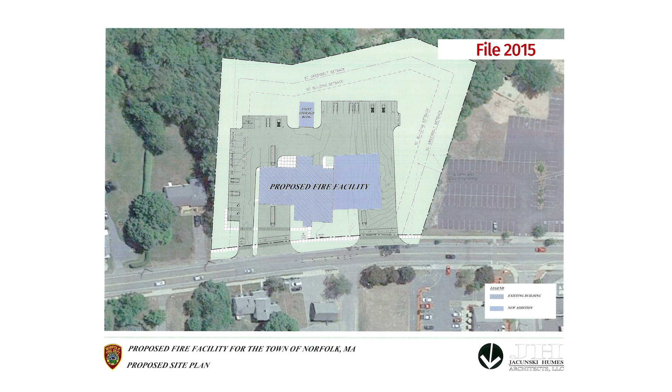The cost of the renovations at 14 Sharon Avenue significantly exceeded the budgeted construction cost and did not leave enough money to complete the fire station renovations.

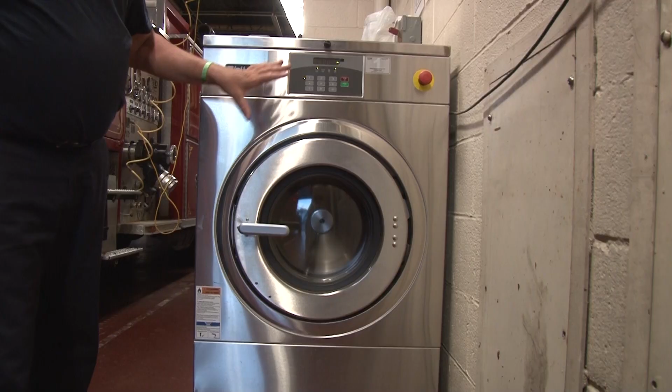Since that time, the fire department has continued to make the best of it and operate in a building that is well past its useful life, is not compliant with current building codes, and limits the department's ability to function in an efficient way. However, the good news is that $3.3 million remained from the amount approved at the 2015 town meeting, which allowed the town to take a fresh look at the project.

In January 2021, the Select Board decided to restart the fire station project by forming a Fire Station Building Committee. Using the money remaining from the 2016 project, the committee was tasked with: 1.

Soliciting proposals from, interviewing, and recommending the hiring of an owner's project manager and architect for the project. 2. Working with the selected OPM and architect to develop a fire station that will meet the current needs of the department, as well as consider future needs for expansion.

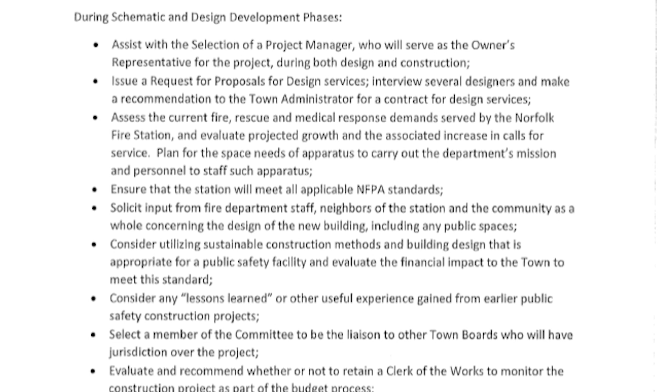3. Ensuring that the project is in keeping with the town's character and implements sustainable design practices that align with Norfolk's designation as a green community. 4. Meeting with the Select Board at critical milestones to provide project updates and receive approval to move forward with subsequent design phases. And finally, developing methods for community engagement and understanding for the project.

With these tasks in mind, the Fire Station Building Committee was formed in March of 2021. The Select Board desired that the committee include members of the community with backgrounds in the architecture, engineering, and construction industries, and that goal has been met.

In addition to the fire department chief, town administrator, town finance director, and a town resident firefighter, the remaining community members all have architecture or engineering backgrounds and are familiar with the Massachusetts public construction process.

Since forming, the committee has worked diligently with the selected OPM, Vertex, and design team led by architect Doran Whittier to develop a cost-effective project that is in alignment with current building codes and best practices, as well as meets the needs of the department, while keeping an eye to the future to account for inevitable department expansion.

And while the 2016 project was not a success in terms of improving the conditions at the fire station, this committee is implementing lessons learned from that project.

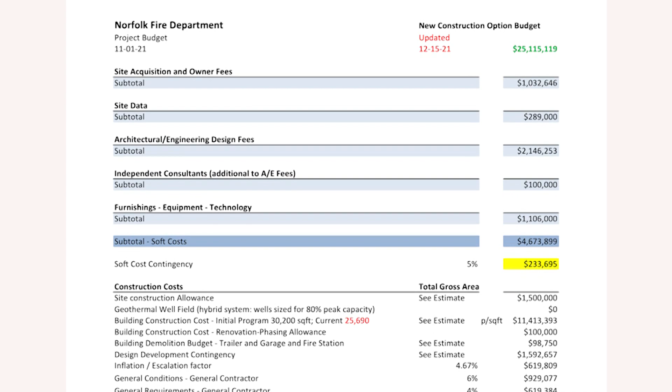These include: first, having a construction bid in hand at the special town meeting where the project will be voted on. One issue with the 2016 project was that the cost approved at the 2015 town meeting was based on a preliminary estimate and did not capture design changes as the project developed.

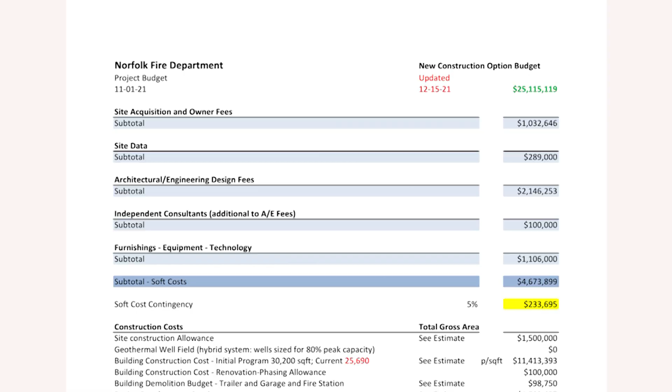The approach of this project is to come to the 2023 town meeting with actual contractor bids so that the costs are more accurately known. Second, meeting with the community to discuss the project and solicit feedback.

The committee hosted community events where we presented the project and answered questions. These events were hosted on November 3rd, 2021, February 16th, 2022, May 18th, 2022, and most recently at the Fire Station Open House in October 2022. If you couldn't attend these events, video recordings are available on YouTube and the town website.

Finally, making project information readily available to the public.

We've accomplished this by utilizing the town's revamped website, where video recordings of all our committee meetings, including our community events, are available. Answers to frequently asked questions, copies of meeting minutes, and other project documents are available there as well.

The project team has been hard at work since we presented the results of the feasibility study back in December 2021 to get documents ready for construction bidding. The project will be bid in November 2022, with bids received in late December.

Once receiving the bids, a special town meeting will be held on January 11th, 2023 to see if the project will be approved, and a ballot vote will be held on January 28th. Early ballot voting will be available, and the town clerk has additional information on early voting.

This is an important project to address the poor conditions the fire department is currently operating in. However, regardless of your opinion on the project, it is extremely important that everyone come out to the special town meeting to have their voices and votes heard. A 2/3 yes vote of town meeting attendees is required to have this critical project go forward.

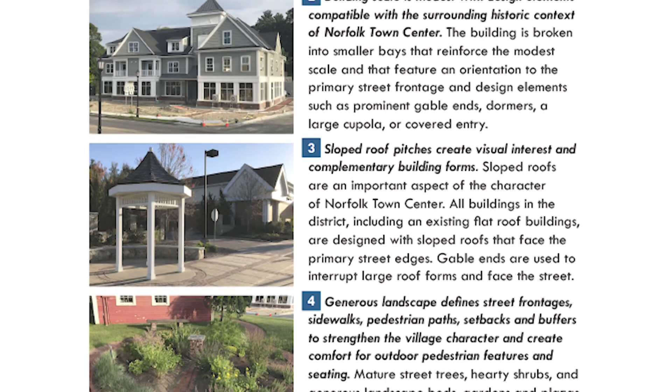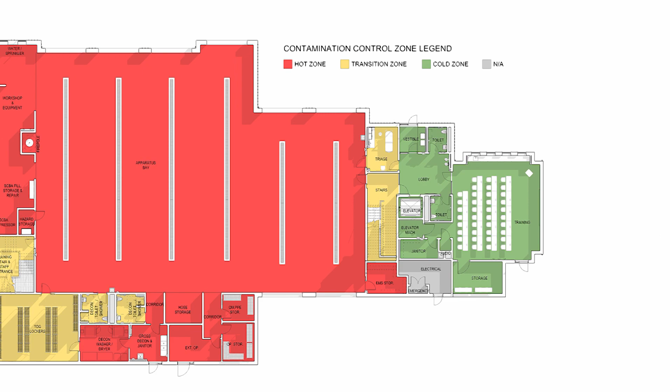Town zoning requirements have been modified, including requirements such as pitched roofs, building height limits, landscape separation, and on-site stormwater management. The state has adopted the International Building Code and includes stringent new requirements for structural design, wind speeds, electrical infrastructure, and energy efficiency. NFPA codes for firefighter safety and facility safety were not in place, including requirements for decontamination rooms, isolation rooms, and for barriers and separation between non-contaminated spaces, neutral areas, and contaminated areas. All of this requires more area in the building.

Norfolk has voted to become a green community, and as such, the project is designed to meet many LEED standards. The project will be solar ready and has considered net zero approaches through the Mass Save program, which provides zero carbon emission design.

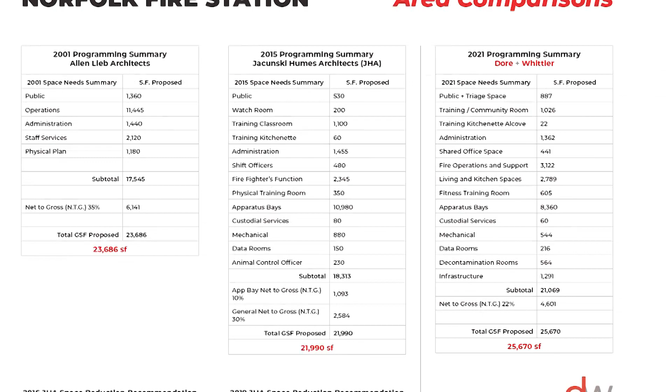I will move on to the building square footage today versus previous studies in 2001 and 2015. In 2001, the new station was sized at roughly 23,700 square feet. In 2015, a new station was sized at roughly 22,000 square feet.

These studies both assumed off-site storage of some large department equipment, such as the boat. The planning study performed by the current design team started with a facility of 32,000 square feet.

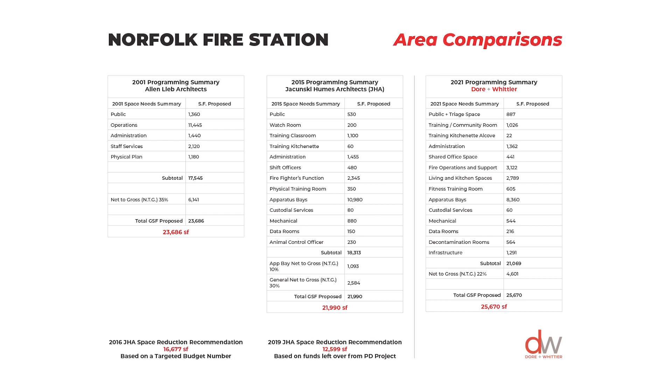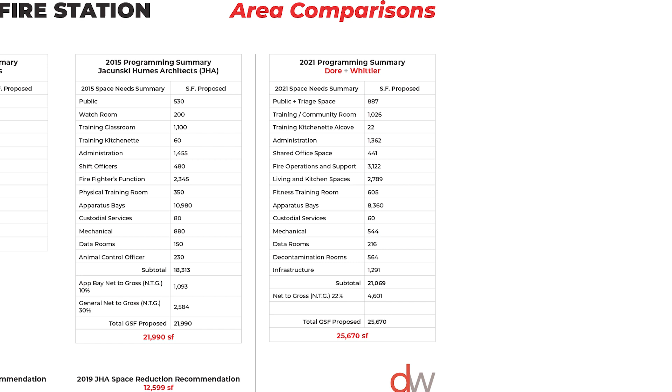Working collaboratively with many department heads and the Fire Department Working Committee, taking into account current zoning, building and safety codes, accommodating the department's storage requirements on-site, and responsibly planning for future growth, the design team settled on a proposed station of 25,700 square feet. This is a full 6,000 square feet less than the 2021 starting program, and only 2,000 more square feet than noted in 2001.

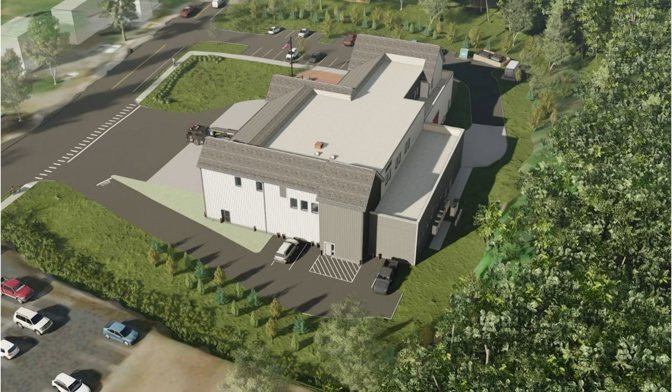The design team is also proposing a 2-story structure. 2-story structures are often more efficient in terms of envelope and roofing costs. Further, the design team has worked to use the volume of the various spaces to accommodate the mechanical, electrical, and plumbing equipment, rather than resorting to additional space to rest them all on the floor or placing them on the roof. The roof is now clear for future solar installations.

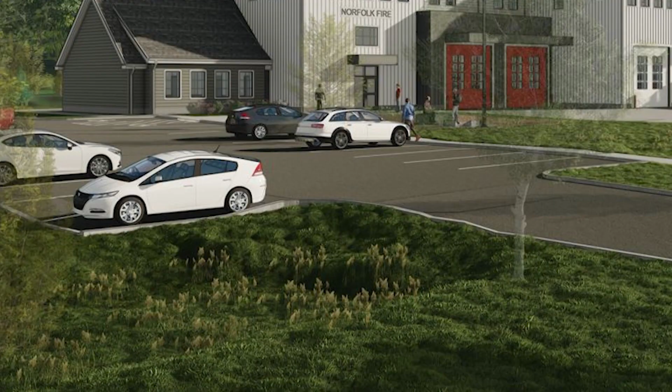The third item I'm covering is the sustainable design practices being implemented on the project, perhaps most efficiently communicated by simply using a list. The project has planned for sustainable site design and stormwater drainage measures, sustainable water use utilizing low-flow fixtures, high-efficiency HVAC and electrical equipment, and enhanced exterior wall and roof insulation for energy savings.

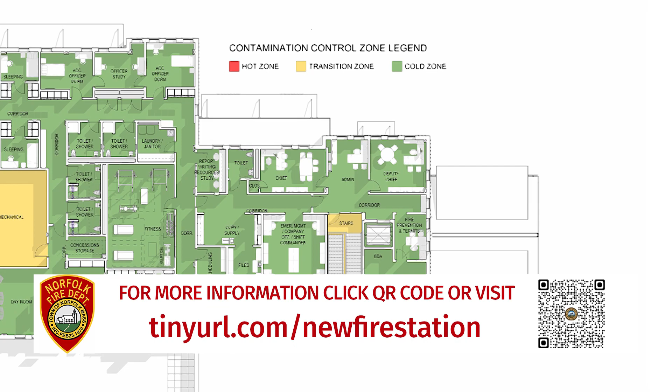On-site gray water for septic infiltration, low and no VOC interior finishes for high-quality indoor air, occupancy sensors to reduce energy based on actual occupant loads, power, and lighting needs, fixed windows to negate air leakage as part of the reduced air infiltration strategies, durable interior and exterior materials to minimize maintenance and repairs, system commissioning to ensure optimal operation of mechanical and electrical systems, exterior wall commissioning to ensure optimal air barrier performance to minimize air infiltration, and compliance with Mass Save Zero Net Energy Ready program to reduce future costs and qualify for incentives.

I'll finish with the feedback we've received from other town boards and committees. First, the Design Review Board. The board has reviewed the exterior of the proposed station at major milestones and is generally supportive of the process, design direction, colors, and materials being proposed.

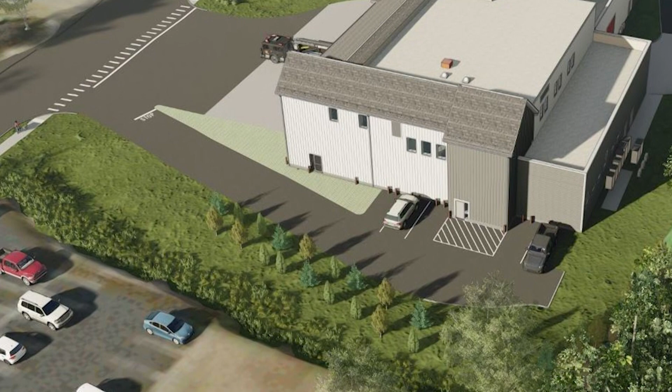Second, the Zoning Board. The town bylaws include requirements for separation between commercial and residential zones, in part to ensure adequate natural screen separation. The board and abutters in attendance considered that the fire station is an existing use that has been in place for many years, and that existing on-site vegetation provides sufficient screening. As such, the board granted a special permit to allow reduction of a 50-foot setback from residential zoning.

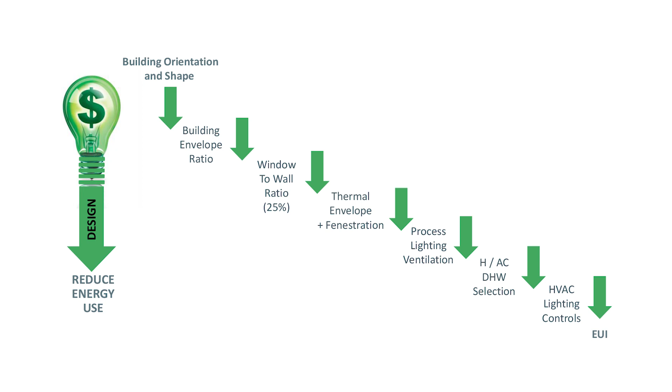The Energy Committee was favorable to the incorporation of a solar-ready facility. The roof, structure, and infrastructure are being planned so that future solar installation can be added to the building. The committee suggested providing additional solar output through canopies over the parking areas, which would allow the project to be net zero—meaning the building would produce more energy than it uses.

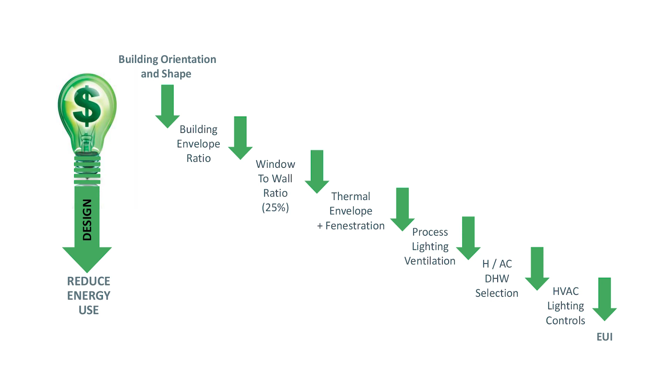Town bylaws currently do not allow solar installations in front of buildings. There was also discussion of geothermal wells. The design team advised that project research had shown the cost of the system was far beyond its expected returns, so geothermal was abandoned.

The Select Board has generally supported and applauded the efforts of the team as being both thoughtful and transparent. There was discussion about ensuring the project is built to accommodate future expansion of the department, so that we were not looking to expand the building after just a few short years.

There was also discussion about ways to consider a smaller building—what would it mean to build a smaller station at, say, 16,000 square feet? The design team and the committee noted that a 16,000 square foot building would fall far short of meeting the current needs of the department. The committee and design teams have also reviewed the schedule to completion, the process for town voting, and have coordinated the needs of the project with both the state and the town.

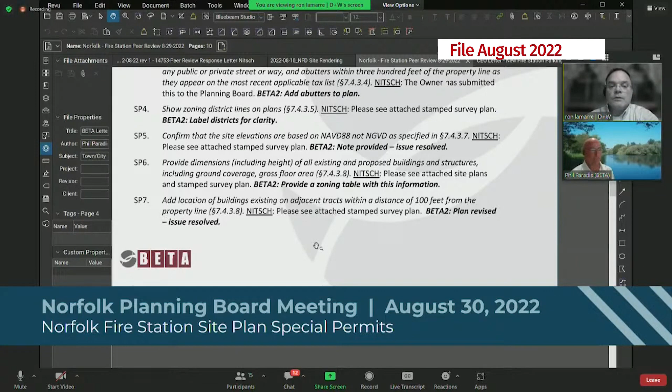The Planning Board had significant discussion on how stormwater management is being proposed and why rain gardens and basins were being used in lieu of underground structures. We discussed that the design team is proposing a sustainable and cost-effective system that, while not the typical approach in town, will meet all bylaw requirements. The Planning Board has accepted the proposed approach.

There was discussion on keeping the plantings in the basins maintenance-free. The basins will have grasses and flowers that can be mowed once a season. The DPW was accepting of this approach.

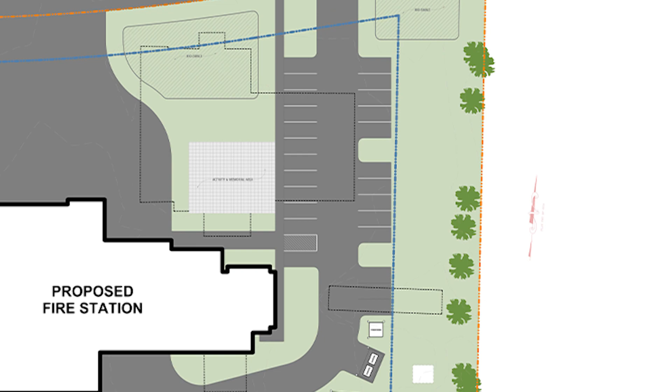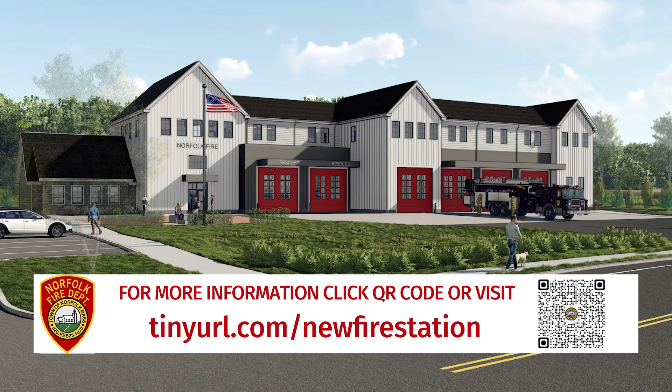Parking count was discussed, as the design team proposed fewer spaces than the town's building official originally anticipated. The architect referred to the code and recommended a designation as a non-recreation public facility, rather than the original interpretation of mixed use, which would have resulted in significantly more parking than needed. After review and discussion, the planning board and building officials agreed with the non-recreation public facility designation.

Hot off the press, the Planning Board has just approved the special permit for the proposed project.

Hello, I'm Fire Chief Erron Kinney. I'm here to share today a little bit about the design process and how we used the working group committee to bring the project design into focus.

The working group consists of the architect, the owner's project manager, the facilities director, finance director, town administrator, and members of the fire department.

As a group, we work together using a systematic process to create, define, refine, and implement a building program focused on the current and future needs of the community and the fire department.

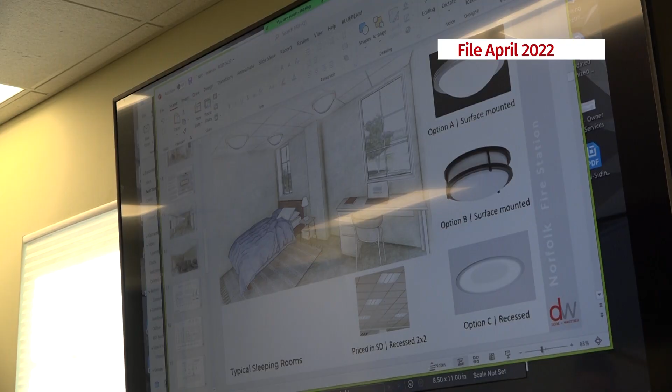The committee has designed a needs-based facility where all areas of the building will be put to use day one to support the core programs and services provided to the community by the fire department.

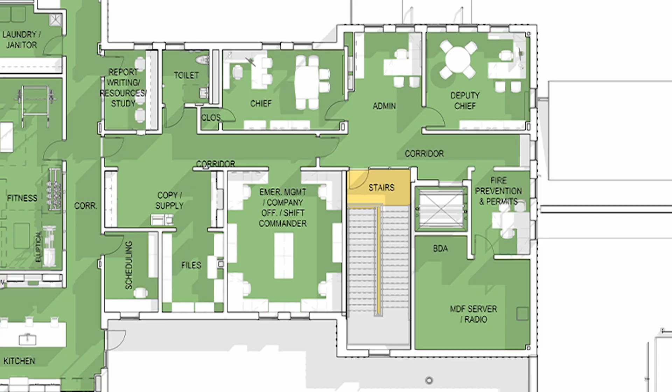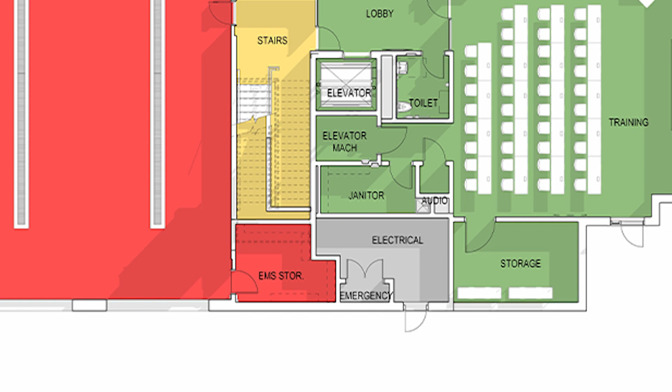We removed a fire pole via engineering and the stair design. The bidirectional antenna amplifier closet was eliminated using engineering. The water entry room was also eliminated using engineering by our architects.

And the circulation space was reduced to 22% instead of the standard 30 to 35%, which exists in most fire stations. These strategies, when implemented, reduced the overall size of the project by 5,000 square feet.

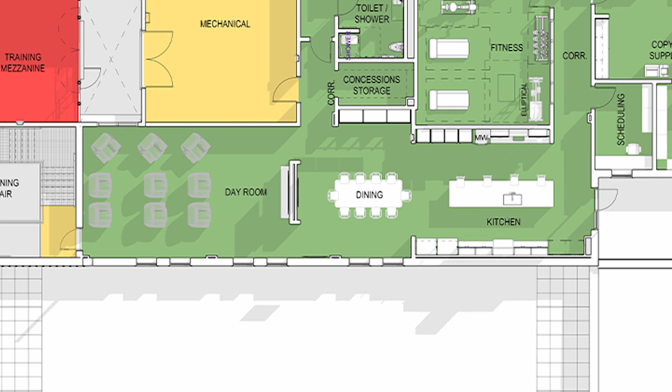The kitchen, dining, and day room are set in an open floor plan. There is a combined tool room, workshop, SCBA storage, and fill room, combined and shared lobby space.

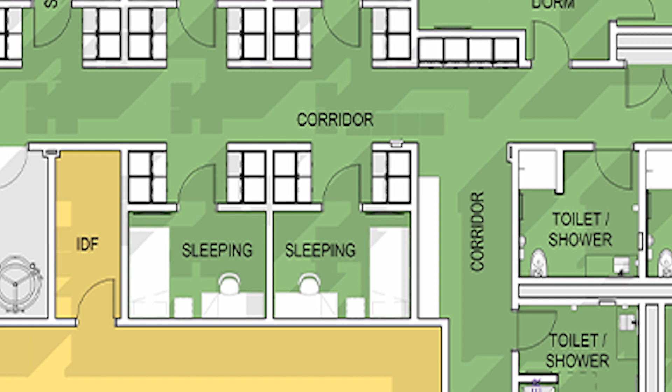We have combined or created locker space outside of the bunk rooms for personal storage, so personnel may have storage for their personal effects. That has been incorporated into the bunk room space so that we don't have inefficient or dead space with individual locker rooms.

Also, personnel from the fire department made sacrifices as we worked as a work group to create cost savings and again reduce the overall footprint of the building.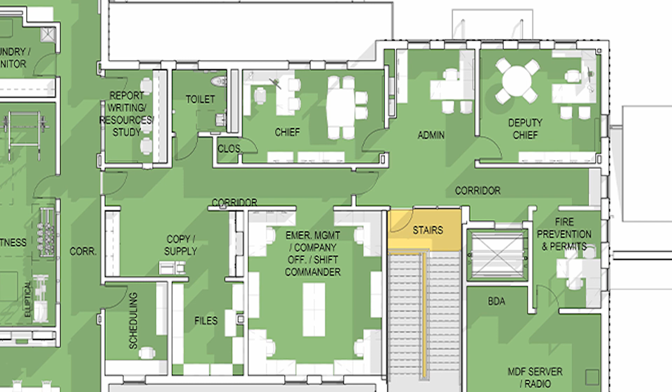Some of those sacrifices include the consolidation of all administrative spaces to one level on the second floor, combined officer workstations to reduce or eliminate the need for individual offices, and reduced depth of 2 of the apparatus bays. We also have fixed non-operable windows.

The reason for the fixed non-operable windows is it creates a more efficient building and a more cost-effective use of all of the technology that we use for energy efficiency within the structure.

The final key component that I wanted to discuss is the benefits of the project to the community. This project will allow for more efficient and timely emergency response, as personnel and vehicles will all be housed in the same facility.

It will allow for and facilitate safer emergency response, as personnel will no longer have to traverse across a parking lot and be exposed to the conditions of the weather.

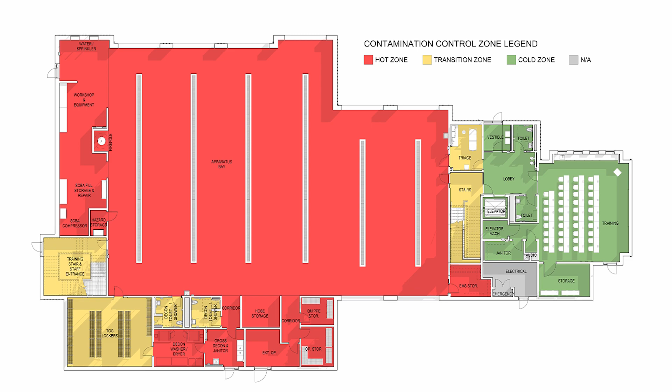The new project eliminates exposure and contamination risk to the public as well as the fire service personnel by implementing new codes and NFPA standards that create warm, hot, and cold zones within the occupancy and decontamination areas.

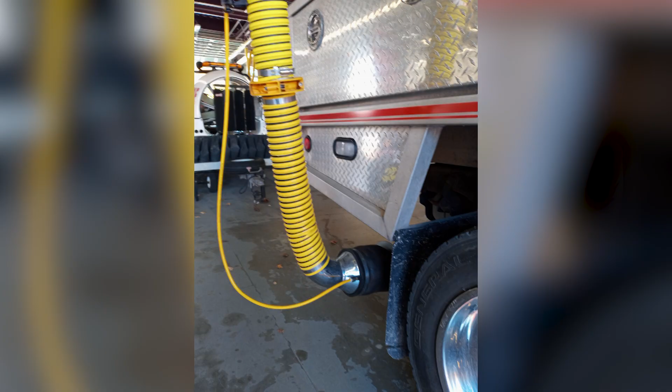The new building also has exhaust remediation built into the structure to eliminate exposure to carcinogens produced by the fire apparatus and the various tools that are used by firefighters.

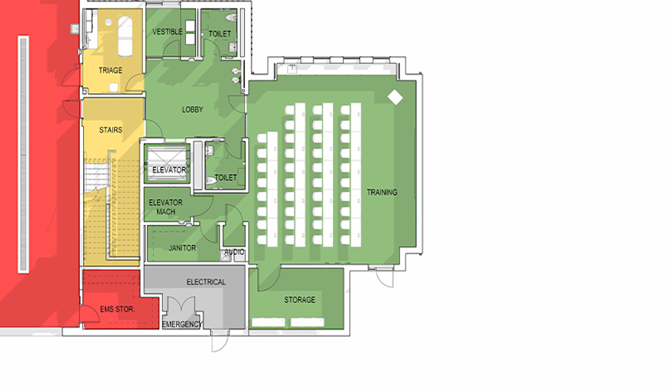The new facility is code compliant, low maintenance, and energy efficient, bringing overall cost savings and a more efficient and effective building for the town. This building also incorporates additional community space and facilitates more community interaction and meeting space with the town and for the town.

Another added benefit is enhanced morale and recruitment and retention of personnel. We all know how challenging the current labor climate is. And lastly, all public spaces within the new building will be ADA compliant.

For all of these reasons, the committee strongly believes they have designed and implemented a cost-effective program that is not only energy efficient and code compliant, but will be a great benefit and asset to our community.